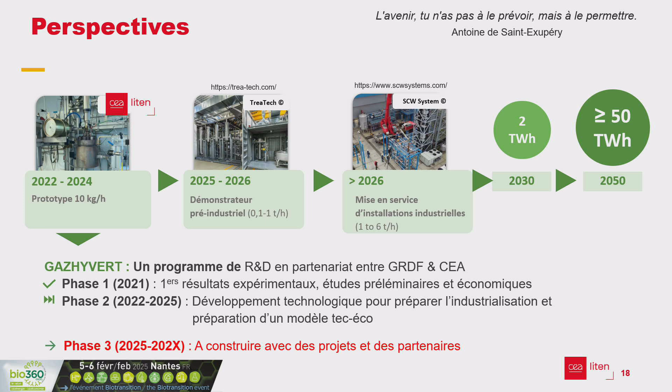Concernant les résultats de l'étude technico-économique effectuée par un laboratoire spécialiste du CEA, nous nous sommes positionnés dans le cas de traitement d'1 tonne de matière brute par heure, en nous positionnant sur la 20e unité de gazification, avec des hypothèses sur les CAPEX.

Avec ces hypothèses, on arrive à un coût de traitement de la boue de 184 € par tonne de matière brute, sans aucune valorisation des coproduits.

Si on applique la valorisation du gaz produit, on descend à 132 € par tonne de matière brute pour le coût de traitement de cette boue.

Et si finalement on arrive à valoriser l'hydrogène, la chaleur et les sels, on peut descendre en dessous du prix bas de l'incinération, fixé à 90 € par tonne de matière brute, et obtenir un coût de traitement de la boue à 67 € la tonne de matière brute.

Ces résultats sont assez positifs et très encourageants pour la filière. À prendre en compte : on se positionne sur une situation où on a aussi du water gas shift avec PSA pour pouvoir séparer les différents coproduits.

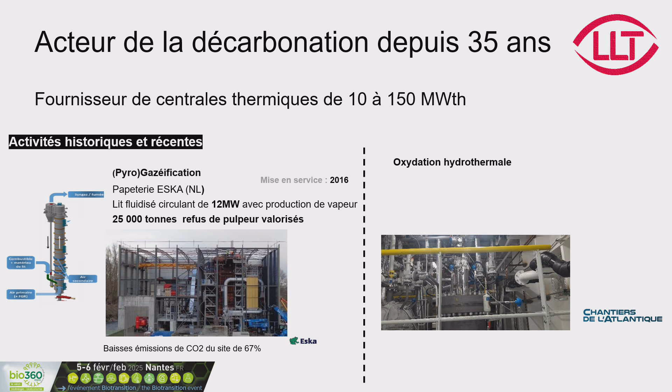Ce sont des petites villes flottantes où on trouve pas mal de déchets similaires à ceux qu'on peut retrouver à terre. Donc naturellement, on s'est orienté vers la gazification hydrothermale, du fait qu'on travaille déjà avec des gazifications solides et de l'oxydation hydrothermale. Et donc on s'est rapproché...

On s'est positionné sur la brique technologique qui va du périmètre pompe haute pression jusqu'à la partie séparation de phase, avec l'intégration énergétique, la fourniture notamment d'échangeurs de chaleur, qui fait partie de notre corps de métier. On laisse à nos collègues experts la partie prétraitement des intrants et préparation d'intrants, ainsi que la partie traitement du gaz, où on n'a pas forcément de valeur ajoutée.

Nous sommes plutôt positionnés sur de la gazification hydrothermale haute température, avec des températures de l'ordre de 660 degrés et des pressions qui avoisinent 280 bars. On n'a pas d'utilisation de catalyseur. C'est une gazification qui produit notamment de l'hydrogène, du CO2 et du méthane, dans des proportions relativement similaires.

Après, en fonction des usages, on peut utiliser de la méthanation catalytique ou biologique, où des gens travaillent au niveau du groupe de travail de gazification hydrothermale pour pouvoir pousser la fraction méthane.

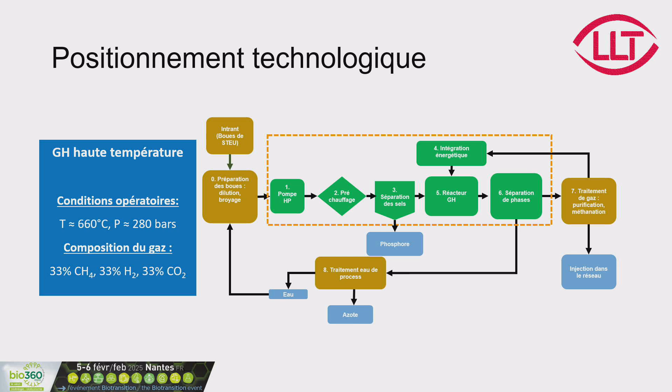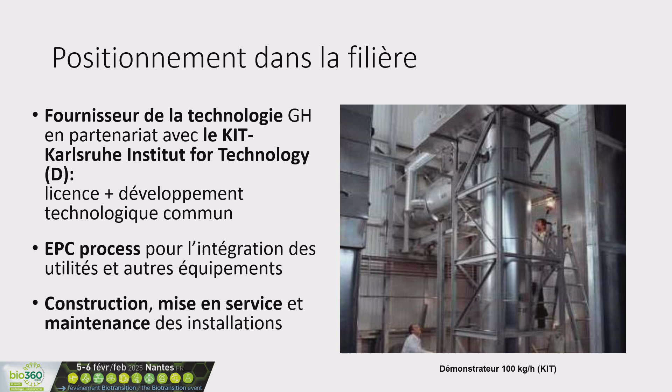D'un point de vue positionnement dans la filière, on se positionne comme pour les chaudières en EPC process, où sur la brique process on fournit tout ce qui est partie électricité, contrôle commande, analyse fonctionnelle sur la partie qui nous incombe. D'un point de vue technologique, on s'est rapproché du KIT en Allemagne, premier développeur de cette technologie au sein des laboratoires, avec un démonstrateur de 100 kg/h, où on a fait une alliance de développement technologique et d'acquisition de licences pour capitaliser sur leurs résultats, notamment au niveau des boues de stations d'épuration, et pouvoir développer la technologie. On s'occupe de la construction, la mise en service et la maintenance à terme des installations. C'est vers ce qu'on souhaite aspirer dans les années à venir.

D'un point de vue avancement au niveau de cette technologie, on a un projet dans le cadre de France 2030, qui est soutenu également par la région, pour le design d'équipements type échangeur de chaleur, pour valoriser la thermie en sortie de process et arriver à des taux de rendements thermiques qui dépassent les 70%, pour pouvoir viabiliser cette technologie.

C'est l'un des nerfs de la guerre avec la partie séparation de sel et la partie réacteur. On travaille sur le design et le développement de ces équipements pour différentes typologies d'intrants, notamment les intrants industriels issus aussi de la chimie, mais également les boues de station d'épuration, avec des analyses technico-économiques qui nous permettent de définir la taille des équipements pour chaque intrant et estimer la rentabilité pour le déploiement industriel.

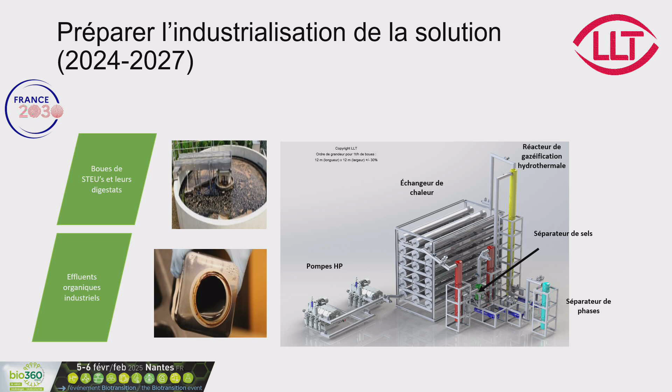En parallèle, il s'avère aussi qu'on a pas mal de demandes d'un point de vue études. Un petit pilote nous semble aussi important. Donc on est en train de mettre en œuvre un pilote de 10 L sur notre plateforme qu'on appelle Innovenergy à Nantes. On est un peu les locaux de l'étape, à moins de 20 minutes d'ici, avec une plateforme de gazification en lit fluidisé, où on peut faire des tests grandeur nature sur différentes typologies d'intrants solides, comme les combustibles solides de récupération, ce qu'on appelle les CSR, ou également tout ce qui est bois B, biomasse. On a une partie gazification, on a une méthanation biologique au niveau de notre site où on peut transformer le syngas en méthane de synthèse.

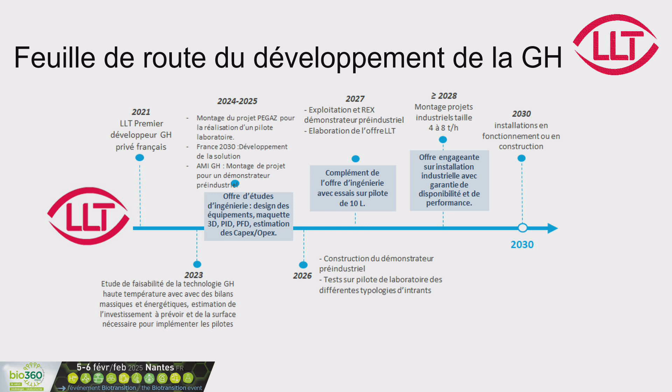Bonjour à tous. Je ne suis pas le local de l'étape, on vient de Suisse. Je suis Gaël Peng, le directeur technique chez TreaTech. Aujourd'hui, je vais principalement vous présenter notre nouveau petit bébé, enfin petit bébé quand même une certaine taille. Mais avant de rentrer dans le vif du sujet, je vais quand même faire un bref rappel de nos technologies catalytiques.

C'est vrai que ça n'a pas été tellement mentionné, mais il y a quand même 2 grandes familles: la gazéification hydrothermale non catalytique, plus vers les hautes températures, et nous, on travaille aux alentours de 400, 450 degrés, 250 bars environ. Et pour cela, bien entendu, on doit faire appel à la catalyse. Donc personnellement, ça fait depuis 2011 que je travaille sur la catalyse dans ces conditions-là.

On a quand même développé un catalyseur assez efficace pour convertir la matière organique en syngas, relativement propre, on va trouver 3 molécules. Généralement ce sera du méthane, entre 50 voire 70%. On est à 5 à 10% d'hydrogène. Et le CO2 peut varier entre 30 et 40%.

L'avantage aussi de produire le gaz à haute pression, c'est que ça facilite aussi la séparation du CO2. Et ça, c'est vraiment un point clé pour les clients, surtout pour les clients dans le secteur industriel.

Donc en plus d'avoir un syngas, on a aussi une eau de procédé. Et ça, c'est pas négligeable parce qu'en termes de volume, surtout si on traite des intrants aqueux, il faut être sûr que les normes soient respectées, notamment les teneurs en carbone organique total, ainsi que la teneur en ammonium. Ça peut demander du post-traitement qui n'est pas négligeable sur le coût de la technologie, et ça peut être vraiment un point important.

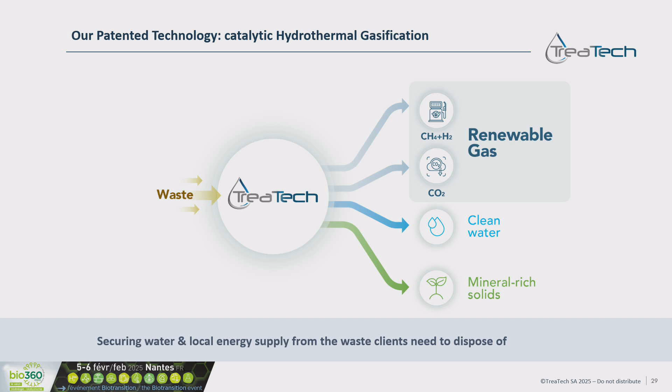Je vais passer sur la slide suivante. Donc l'année 2024 pour nous a été une très très grosse année. C'est vrai qu'en 2023 on a pu terminer notre levée de fonds Série A, qui nous a permis de construire cette nouvelle unité pilote. On a débuté l'année avec la construction, l'installation vers l'été, et la mise en service a commencé dans le courant de l'automne.

On a quand même dû choisir un site industriel parce que la plupart d'entre vous savez qu'on a déjà un pilote à l'Institut Paul Scherrer, mais ce pilote se trouve dans un milieu académique. Et pour nous, c'était essentiel de pouvoir être sur un site industriel, justement pour faire des essais de longue durée.

Donc le site d'éco-recyclage se trouve dans la région lémanique. Avantage, c'est qu'on est à peu près à 15 minutes de notre bureau, donc pour les équipes, c'est pas négligeable. L'autre avantage, c'est qu'on a aussi la possibilité d'injecter directement notre syngas dans le gazomètre, qui est ensuite mélangé au biogaz pour être épuré et injecté dans le réseau.

C'est possible, bien entendu, parce que la quantité produite est faible. On est à quelques normomètres cubes, peut-être 20 normomètres cubes au maximum, alors qu'éco-recyclage, ça sera quelques centaines de normomètres cubes. Par année, en fait, éco-recyclage injecte environ une vingtaine de gigawattheures dans le réseau. On peut aussi mentionner que la plupart des déchets du canton de Vaud, des déchets verts, sont compostés, traités, méthanisés sur ce site.

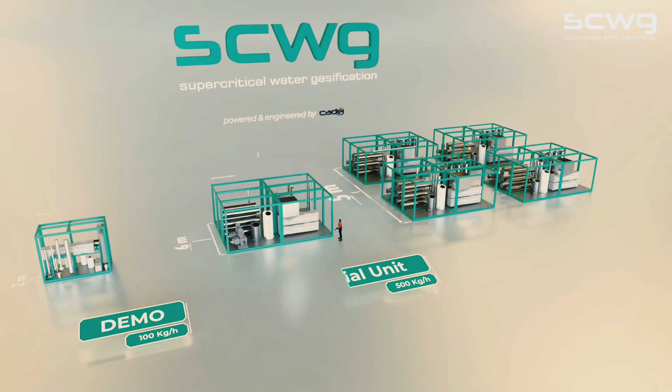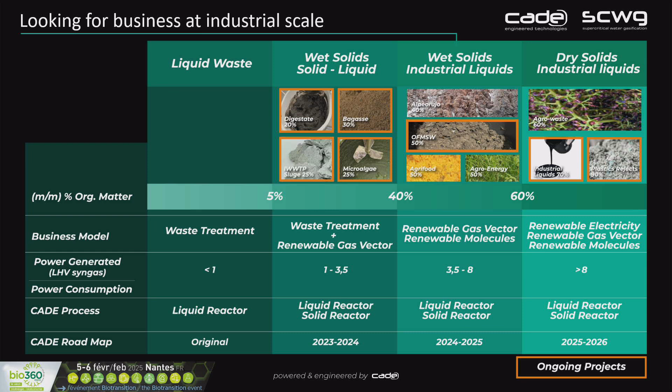I'm going to skip this one because I think I don't have enough time, okay?

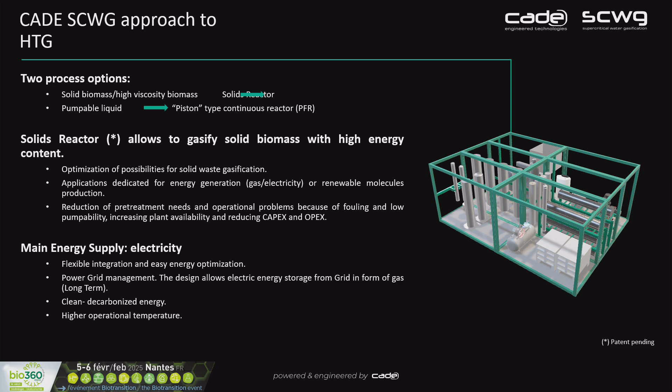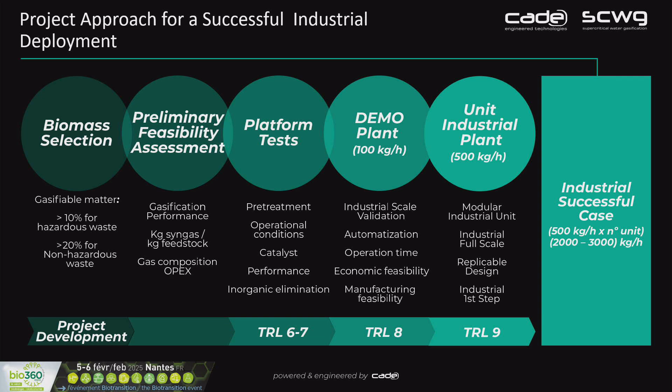Okay, this slide is about the project with a size of 2 tons per hour. This is the different scale of our design. We start with a demo of 100 kilograms per hour. Then we go to 500 kilograms per hour. In this transition, we have a scaling up factor lower than 1:2. All the elements are modular, and these two plants have a similar automation level.

This way, the final industrial scale only uses 1, 2, 3, 4 units equal to the modular 500 kilograms per hour. This way, we want to get a manufacturing time reduction, startup cost and time reduction, and all the units are fully tested from our facilities.

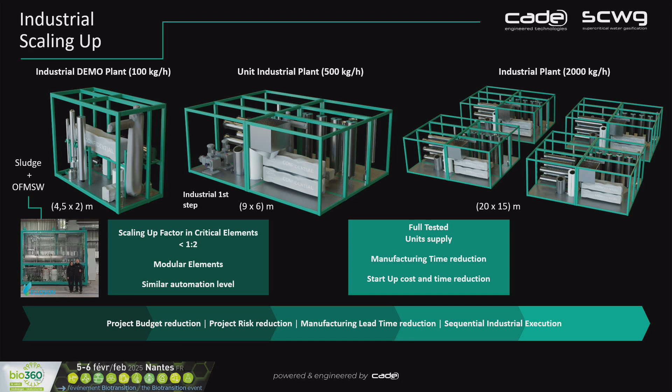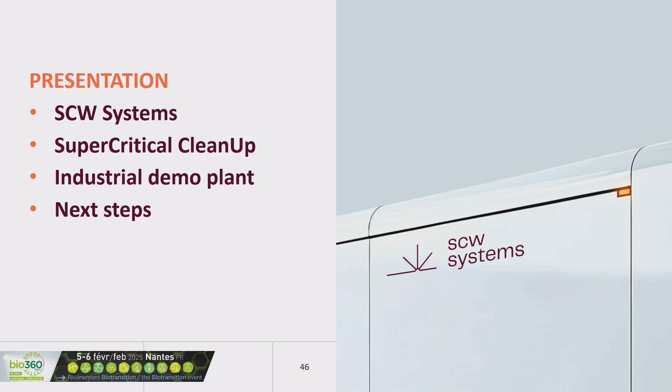So, apologies, but I would like to do it in English. So, SCW Systems. SCW, of course, stands for Supercritical Water Gasification. And our goal is to bend the carbon curve towards zero. So just a brief overview on what I'm going to present today: some insights on SCW Systems, of course about our technology, supercritical cleanup, our first industrial demo plant in the Netherlands, in Alkmaar, and the next steps that we anticipate for Europe, including France.

So, just a quick overview. We are a technology development company, and we have developed several technologies which are focused on creating climate impact. So we have our own direct air capture technology, which is one of the largest direct air capture units worldwide. We have a SuperCritical CleanUp process, with which, apart from mechanically, we can chemically recycle all sorts of problematic waste streams. And of course, it all started with supercritical water gasification. We are over 100 employees at 3 locations in Alkmaar, in the Netherlands.

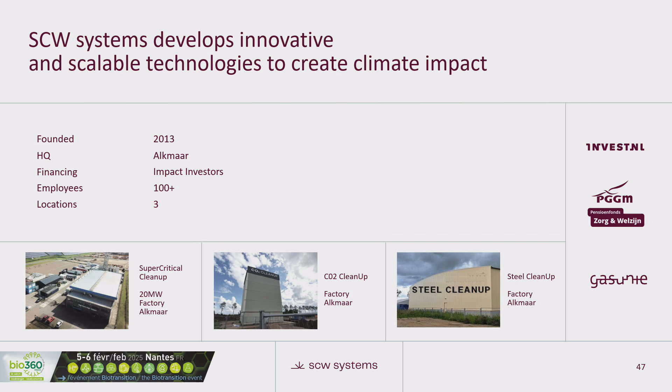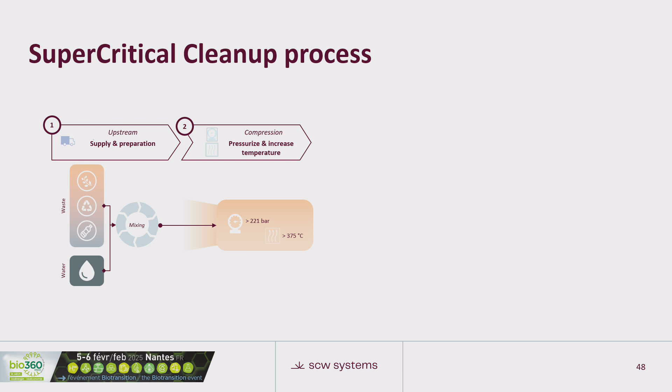So I think this has been touched upon already a couple of times today. You can already draw this whole process, of course. But in general, the process starts with a pre-treatment process. Then, in our case, we pressurize a liquid up to beyond the supercritical conditions of 221 bars. And then we use the heat in our process, with a heat exchanger, to heat up the new incoming feed. Then we've got the cracking of the molecules at an even higher temperature to ensure that all molecules are cracked into gaseous molecules.

And then, in general, we have a syngas consisting of 50% hydrogen, 20% methane, 25% CO2, and approximately 5% CO. So this creates a wide variety of different options. So, of course, we could separate the hydrogen because there's a huge push on getting green hydrogen. But in our case, because we have a subsidy based on green methane, we are converting all the hydrogen into

additional methane. So we use the CO and the CO2 with a methanation step to convert all the hydrogen into methane. And then we have a gas composition consisting of pure methane and CO2. And then we have the gas separation step, and we can inject the gas into the 70 bar high pressure grid of the Dutch gas TSO.

Of course, one of the advantages of this process is that we have the pressure already in the system, so the gas is already available at high pressure. So you do not have additional energy cost for pressurizing the gas.

Oh, this is of course important, because it's not just the gas that's coming out, but it's also the water and the salts that are coming out. And what we have learned is pretty much in line with the gas that needs to be on spec. If you look at the water coming out of your process, then it's also quite a challenge to get the water on spec and to be allowed to discharge the water on the surface or in the sewer. So also the water treatment process has taken us quite some time to get to on-spec water. But we managed.

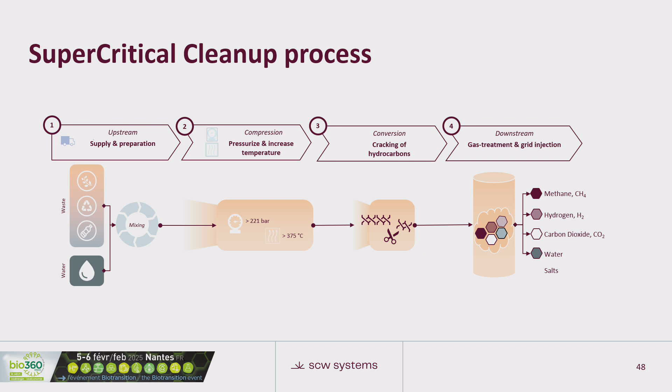And I think this has been touched upon already. It's not just about the flexibility on the output side, so you can actually convert the hydrogen and the CO into a syngas, which can be used as an industrial feedstock for the chemical industry, as a building block. But also on the input side, we have flexibility. So you can use a wide range of different feedstock.

And I think this has already been touched upon. This can be biogenic, and of course, then you produce green hydrogen or green methane. But these can also be non-biogenic, and this is what we call circular gas. This is actually one of the ways to get to a circular and closed carbon loop for the industry, to ensure that you can reuse your syngas as a feedstock again to build new products.

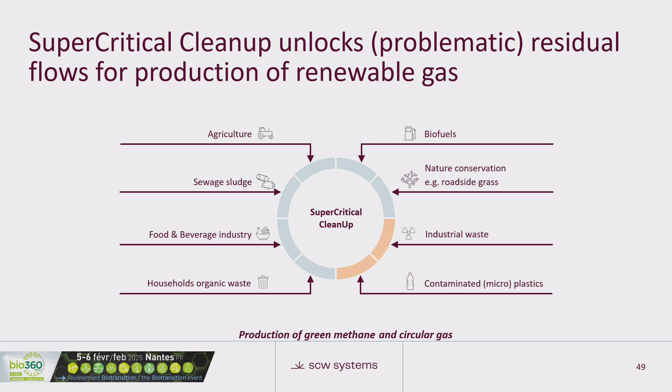So I will show you some pictures of our first industrial demonstration plant in Alkmaar. And in parallel to what we are doing at the industrial site, we also have an advanced lab facility. Out of the approximately 100 people working at SCW Systems, we have approximately 20 people working on research. So we do all our own analysis on feedstock, water quality, gas quality, process conditions, of course. And we do this at lab scale up to 5 liters an hour.

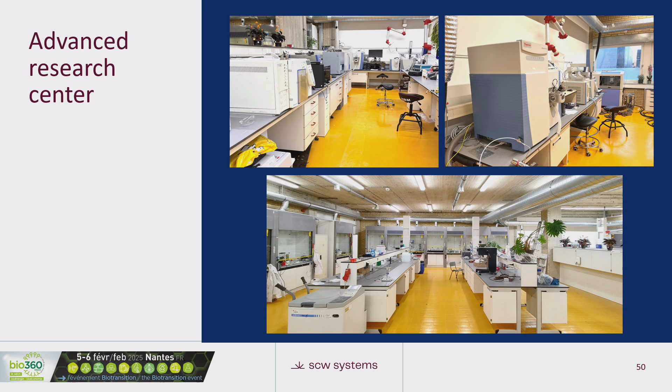So this is the demonstration site in Alkmaar. Here we have a 20 megawatt output facility with a throughput between 10 and 16 tons an hour. We have 4 gasifiers. One gasifier has a throughput of approximately 2,500 liters up to 4,000 liters an hour, depending on the composition of the organics and the required residence time to ensure that all molecules are converted into gas. If you have a relatively complex molecule, then you will need more residence time, and then you have your lower bound of 2,500 liters. If you have less complex molecules, then you have a higher throughput and you go up to 4,000 liters an hour.

We have been running this facility for over 2,000 hours supercritical with our reactors. We have produced over 750,000 cubic meters of syngas, and we have injected over 55,000 cubic meters of on-spec gas into the high-pressure grid. So the whole chain, including the gas treatment process, the pre-treatment process, and the wastewater process, has been running successfully.

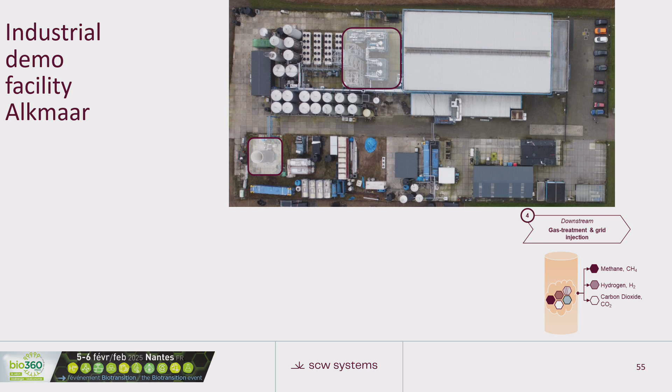And then we have the wastewater treatment and the salt treatment. And the wastewater treatment, so the setup that we have, consists of a skimmer, an ultrafiltration step, an air stripper, a vacuum evaporator, a reverse osmosis unit, and a coal bed. Again, getting the water on spec is really a challenge. And there are definitely processes that are way more effective than what we have done so far.

We are really focused, of course, on ensuring that we can get the gasification process, including the gas treatment process. That is our core focus. But of course, to run the whole facility, everything needs to be in place. And we have put a lot of effort also in the whole wastewater treatment. So I think that has already been mentioned.

One of the advantages, of course, of this technology is that you can actually create clean water, but there are still some contaminations left, which you actually want to reuse for a second cycle. Of course, things that are not converted, there's still feedstock available for a second cycle, but you need to ensure that you can capture these organics again out of your wastewater stream, and that you have your wastewater that you want to discharge on spec.

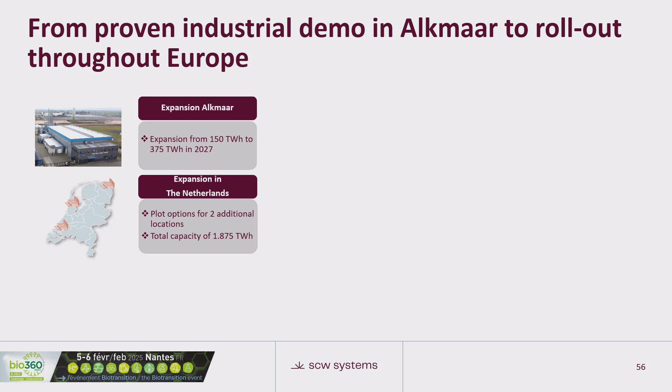So where do we stand? Well, like you have just seen, we have our 20 megawatt installation in Alkmaar. Like I just indicated, we have already bought the plot to expand it with an additional 6 gasifiers. So we get a total capacity of 50 megawatt energy output. And we have a plot option already on 2 additional locations in the Netherlands.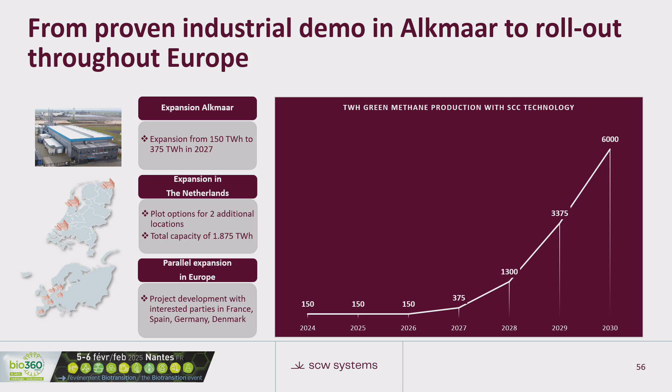And therefore, we are also focused on a next project in France. So we have already been in contact for a long time with Robert, as one of the key people, I think, anticipating this technology and creating awareness for it. But also looking in France to see, okay, how can we deploy this technology? And this is not about showcasing a pilot. That's in Alkmaar. It's about scaling and really creating an impact with this technology.

Hi, I have a question for you at CADE. Can you comment on dealing with salt? We've heard a lot about salt separation from other technology providers. What about you?

About inorganics, how do you deal with the salts and the inorganics in your biomass before gasifying them? Is this a challenge for you? Is this not a problem?

At this moment, we are focusing on the production of syngas, but we have a salt separator, and thanks to this equipment, we remove most of the inorganics from the reactor in the form of salts. Thank you.

Well, I have a couple of questions for all the participants. Thank you for your presentation. My name is Harry Deme from CEA Grenoble. My main question is, very interesting, the high capacity of injection of your units, especially the SCW system, 4,000 liters per hour, but I didn't see which kind of feedstock you use. And the same question is for Gael.